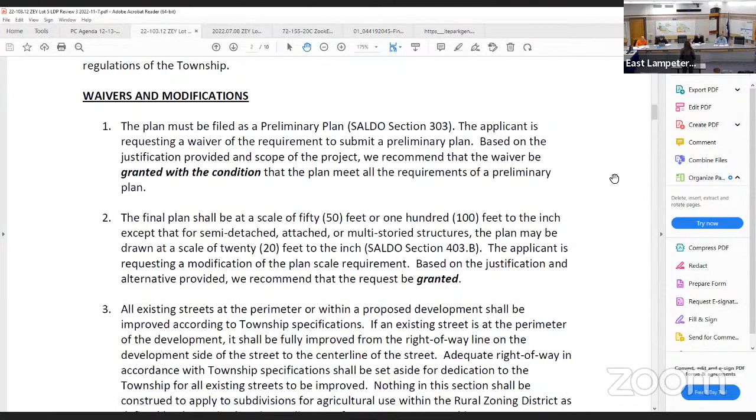I'd like to start by going through those requests, which I don't think will require much discussion. There are 10 total waiver and modification requests, reflected in David Miller's letter. 7 of them are recommended for approval, with little or no conditions placed on those recommendations, so our intent is to run through those 7 first. There are then 3 requests which may require additional discussion, and I think we'll take those last if it suits the Planning Commission.

There's a waiver of widening and curbing along Willow Road — those are 2 separate waiver requests, but can really be discussed together. There's also a request to defer installation of a pathway along Willow Road, which would be provided in lieu of sidewalk. And finally, we are proposing more than 125% of the minimum required parking on this site, which requires approval from the Board of Supervisors. We're asking the Planning Commission to make a recommendation that the board grant that approval as well this evening.

So with that by way of background, I'll have Dave come forward, walk through the plan, and then begin going over the waiver requests.

Good evening. Tony and Claudia generally walked through this, and I'll point out some things as we move forward. This is part of the greater 100-acre campus, business park campus of Greenfield Road, Willow Road, and then the newly constructed Ben Franklin Boulevard, which goes through that tract.

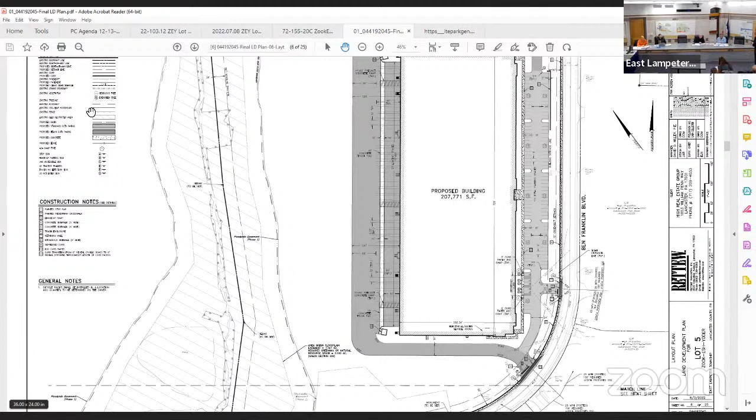The previous development within that business park was an expansion of the Eastwood Village residential community. Thaddeus Stevens is constructed and running. And then, as Tony mentioned, there was a previously approved industrial warehouse, about 229,000 square feet, that has been approved but is pending construction — that's known as Lot 4 over here. Greenfield North, that you're very familiar with, is on the other side of this tributary here.

So we're focused on Lot 5, which is a single warehouse building, a little under 210,000 square feet. It has two accesses, both off of Ben Franklin Boulevard, so no new accesses off of Willow Road. There's pedestrian parking in the front of the building, paralleling Ben Franklin Boulevard, and the loading area in the back of the building.

What's not shown on this particular plan, but would be of interest, is the fact that it's part of — I'll pull up the stormwater management and grading to get a little more flavor of this.

With Greenfield North being to the east, there is the riparian corridor from this tributary that's been planted and will be enhanced as part of Greenfield North. And then a landscape berm to provide further screening between the residential and industrial components has already been installed under a previous permit and planted, so that'll mature and provide nice screening between the uses.

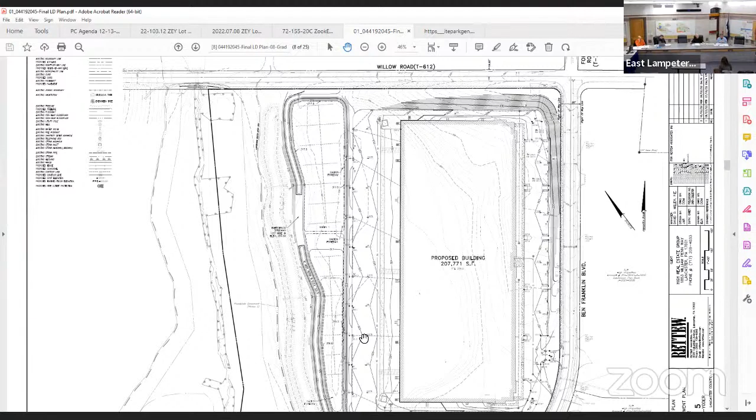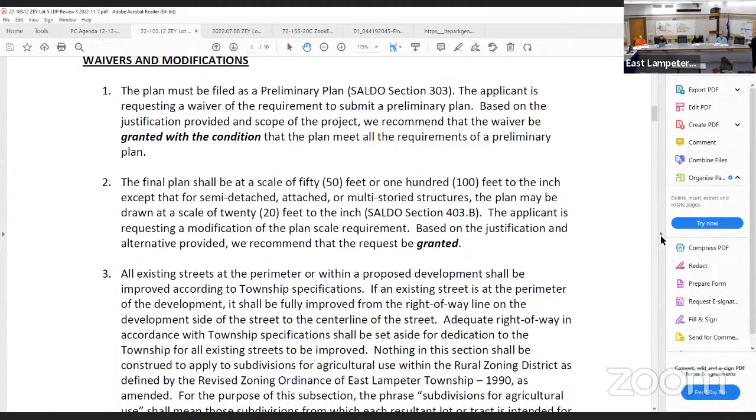Okay, so we do have the November 7th DMA letter. As Paulie mentioned, the first section of the letter is running through the waivers, modifications that we are requesting. I think the more basic ones: we're asking for a waiver of preliminary plan to go straight to final, and a waiver of plan scale so that we can show the information with more clarity.

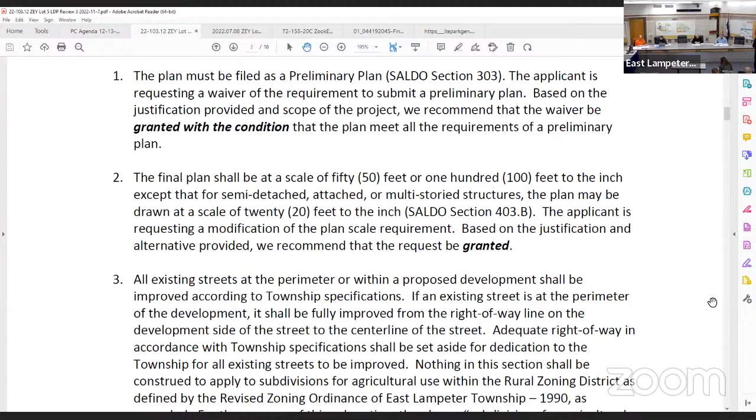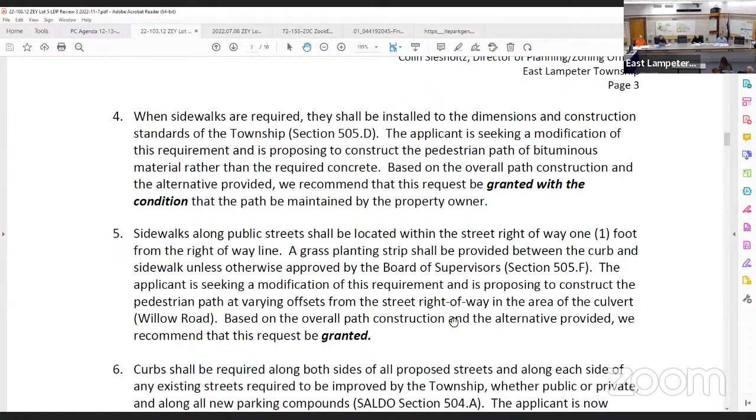We'll come back to number 3. Number 4 is a request that in lieu of installing concrete sidewalk along Willow Road, we would install a bituminous path. That would be consistent with the path being installed on Greenfield North, that cohesive walking trail system. The sidewalk along Ben Franklin Boulevard will be concrete, but then as we get to Willow it would be bituminous. So that's a waiver request of the township standards.

Number 4, Miller's letter also mentioned a condition that it would be property owner maintained. Yes, right, and that's how it is with Greenfield North too, so that's consistent with that.

Number 5 is a request for varying offsets from the sidewalk. The township standard is typically 1 foot off the right-of-way line, which we are providing for the majority of that. But then at the culvert, that's part of a bigger discussion we'll have, we are getting closer to the roadway there and protecting it with guide rail for safety purposes at that point.

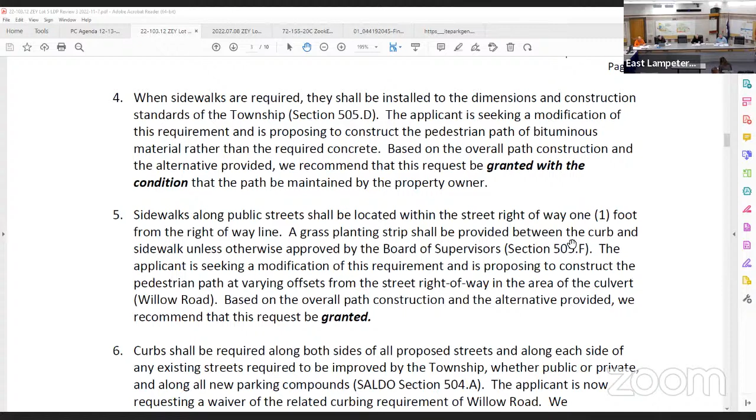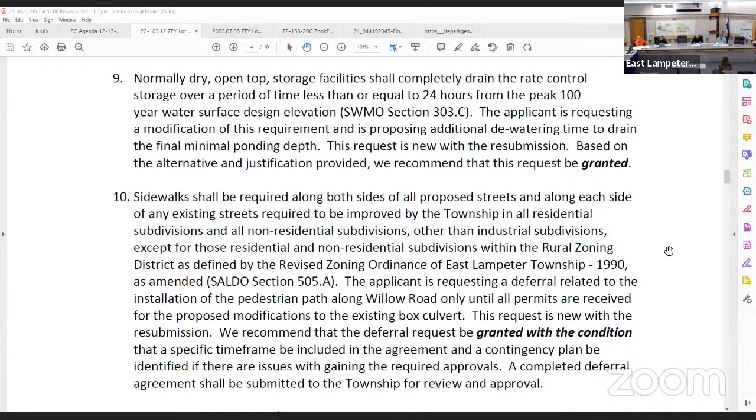So knowing that we want to talk about widening, curbing, and pedestrian path, before we do that, are there any questions on any of the other requests or comments that you'd like to talk to? Not from this side of the table. Thank you.

So Willow Road right now is classified as a collector road. It's a rural setting. Pavement width from center line over is 11.5 to 12 feet on both sides of the roadway. We are requesting a waiver of the widening requirement of Willow Road, which would be 18 feet from center line, technically what the ordinance would require for a collector road: 12-foot lane, 6-foot shoulder.

And we received a waiver of that requirement for Greenfield North portion of Willow Road, and we're requesting the same waiver for those improvements along Lot 5.

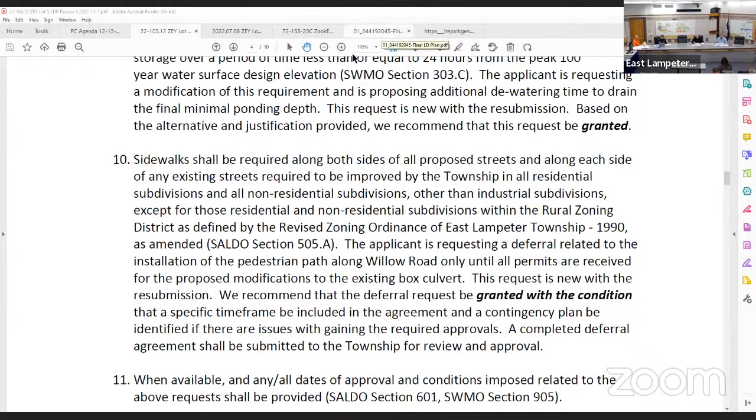Several reasons for that. First and foremost, I think, is to maintain the rural feel, the rural nature of this area. The center line of the urban growth boundary is the center line of Willow Road, so there's no foreseen development north of the road. There's an agreement that water service will not be provided by the city on that side of the road, so it's likely going to be in that rural condition for the very long term.

So from that standpoint, keeping the visual of the rural road. Also, all the development within the business park prohibits truck traffic from utilizing Willow Road or from exiting out onto Willow Road. So they'll all use Ben Franklin Boulevard, go out to what will be a signalized intersection at Greenfield Road and utilize the signal there. So we're not introducing truck traffic to Willow Road for that.

And it was the sense of the Planning Commission and the board to waive that, with no desire to widen Willow Road. With respect to Lot 1, the decision was to grant the waiver. So in this case, on this request for Lot 5, staff supported, DMA supported the waiver request.

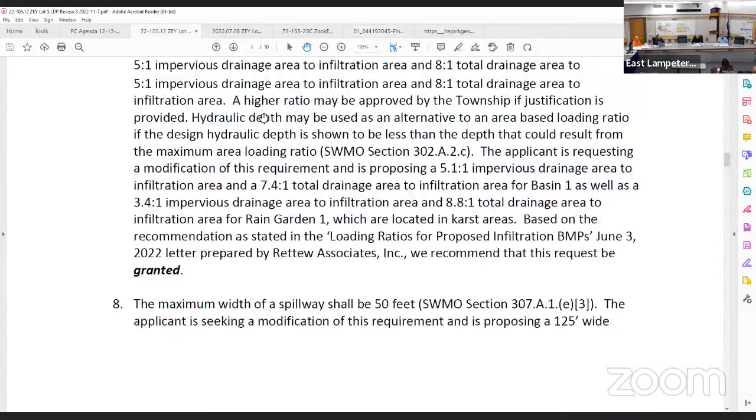Under number 3, we're saying that waiver should be denied, and it was the same in the previous situation that was on the board at that time. It was the waiver for Greenfield North. We're talking about it. Lot 1, which was Greenfield North, that wasn't.

And we can change our mind, but previously we had, and as Tony mentioned, DMA had suggested a deferral. But after some discussion, it was recommended and ultimately approved by the supervisor.

And along with that is the request to waive the curbing of Willow Road, for many of the same reasons: to keep the rural nature of the roadway, for consistency on either side of the business park. The only curbing is on the right-hand turn lane off of Willow onto Greenfield North. It's just a short stretch where it's widened for a right turn lane, and that's curbed. Otherwise, there's no curbing on Willow, so the waiver would maintain consistency with that.

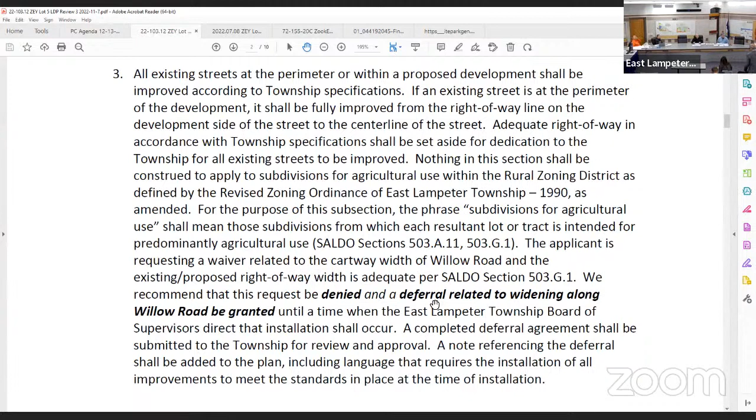You might want to mention about the utility poles. Right, so there are 5 utility poles right along the edge of pavement, right off the edge of pavement, that would have to be relocated for that even minor widening to install the curb. So that's working with PPL to actually get that done, and the cost thereof is extensive, and the time to get that accomplished. There's one near the culvert as well that would be required.

And just to jump back to the stormwater, this is a fairly level road. We're estimating inlets every 125 feet, which is a pretty good frequency. And keeping in mind that all of this will ultimately be owned and maintained by the township, that entire storm sewer and curb would need to be maintained.

One more thing, think about snow plowing. If you don't have a curb, you can push the snow off to the side. If you have a curb, the plow is going to stay a little bit off the curb, so now you have that snow right up against the curb, which also reduces the effective width. And there's maintenance for the township as well. So we did think through this request. We feel quite strongly that it's a better condition to leave the road in its current condition. We really didn't think of a benefit to installing the curb through there, so we're just asking for a straight waiver of that installation.

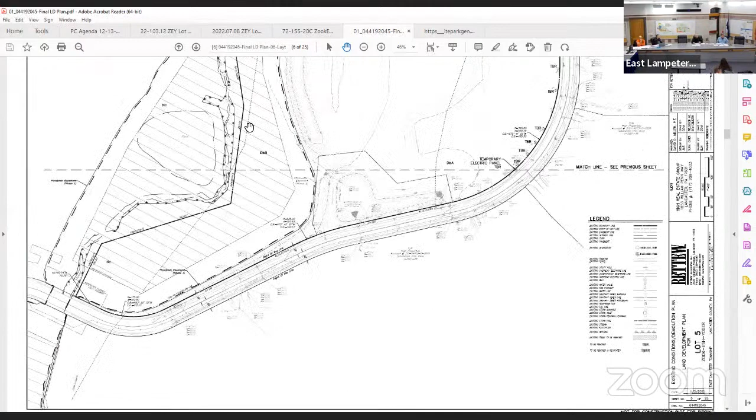At this point, the alternate suggestion would be, rather than continue the full length of Willow Road, circle that back, put the path on the berm of the basin. You get the view of the landscape berm and the riparian corridor through there. And then that would loop back to Ben Franklin Boulevard here and provide that circuitous loop through there. So we think that could be a workable solution, an alternate to all of this work here.

Comments from this side of the table? Darrell, this is Randy. I'd support the removal of the time frame issue, knowing that there are multiple players in awarding permits, some at the state level. So I think it would be challenging to put a time frame into a condition. And the fact that you have a contingency plan in place, I think I could support just granting the deferral request along with the deferral agreement.

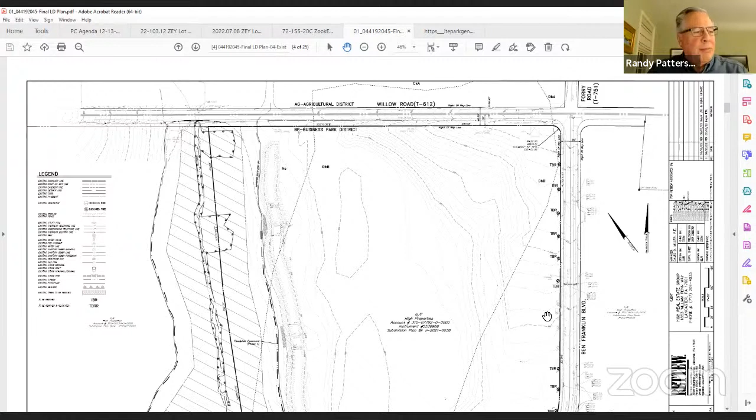If you will, can't that be part of the deferral agreement? Yeah, Darrell, I was going to suggest that language could be included in the deferral agreement, that if the permits were not obtained, as opposed to putting it into the land development plan approval. That's what I thought, yeah, and that was part of this recommendation from David Miller Associates, that a timeline be part of the deferral agreement. So the language could be modified to, and would be included, my understanding, in the deferral agreement, so it's understood what the deferral includes and any conditions.

But I can't speak for staff, because I don't know the discussion on their end of what they're looking at, as you said, the budget for it, to allow for the time to do it, et cetera. And then the other whole part, that third party of permits, is another issue.

No, I agree. I think the question in front of the planning commission right now is whether or not it should be deferred. All the details as far as timing, whatnot, can be hashed out with staff at a later date. But that's acceptable. Refresh me, does the township have standards for sidewalk width?

I believe you typically go a little wider with your bituminous, or am I wrong? It's 5 foot wide. Which matches the township standard. The township's 5, okay. For some reason I was thinking you went a little bit more. The path is 5. I was thinking there were 6, but I'm not sure. My visual is that they look a little wider, and I wasn't sure what you used, if you plow them, et cetera. 6 would probably be easier to plow without tearing up the sod or turf on one side or the other to clear them.

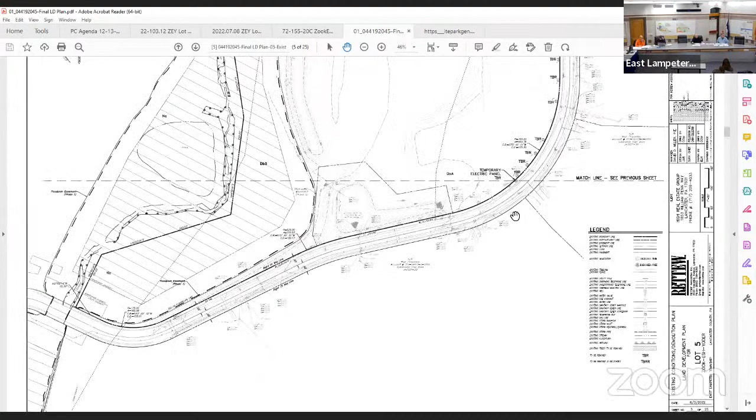And you have circulation along the end of the building? Yeah, right there. I was going to try to get rid of some of the clutter. Yes, this is one way through there, and primarily that is for fire access. So we've run the templates, we've coordinated this with both fire companies.

And they are good with what we're showing. You're showing that one way, and your dark area is the heavy duty pavement. I was just wondering why you didn't continue the heavy duty pavement through the car parking if you're going to run trucks around there. The tractor trailers will use this driveway and come to the back, and there's room for them to go back out the same way. So we don't really want to intermingle passenger vehicles with the truck traffic. This is really emergency. You have heavy duty pavement on the north side of the building, so we do that for fire trucks.

Question about the curbing. I think you mentioned earlier that there's curbing that was installed along the intersection of Willow and Greenfield, is that correct? There's existing curbing on Greenfield Road up to Willow, and there's the curb returns and then it ends. Okay, so but there's no real curbing on Willow.

Just to give a fully accurate answer, Greenfield Road is curbed on both sides. On our side, it wraps around and ends right here. On the other side, the west side, it continues around for, I'll say, 100 feet or so for that turning lane, and then it ends there. So that's really the only stretch that's curbed.

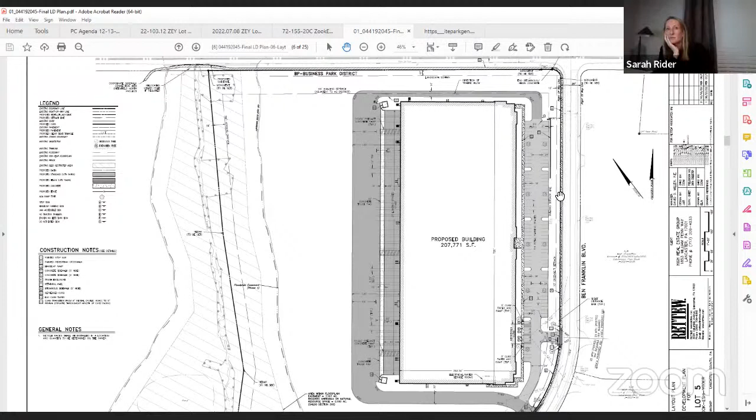Okay, that was my question. So are those intersections pretty similar with curbing? Right, and this is actually, Ben Franklin Boulevard has been installed as part of the previous phase of the business park. So Ben Franklin Boulevard is complete, and then it's curbed along Willow just right at that intersection, just going around to the curb return. Got it, okay. Yep, okay, thanks.

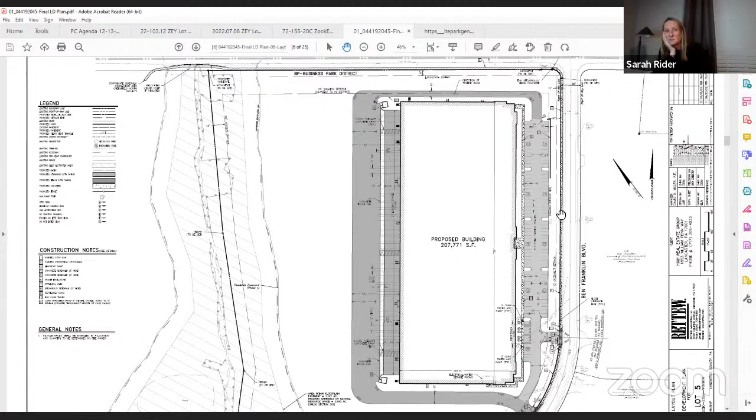And anything else on this? Yeah, we're going to. We can jump onto the parking issue if you like.

This should be a quick discussion, but the zoning ordinance for warehouse stipulates 1 parking space for every 2 employees on the largest shift. So 2 employees, 1 parking space, which in a practical sense is just not enough. This site is projected to have about 125 employees, and by ordinance that would be 63 parking spaces. Again, just not practical. Maybe that works for a city situation, but we believe it's not enough here.

The ordinance allows you to increase that by 25%. We are asking for 114 spaces, which is 181% of the minimum required by the zoning ordinance, so that is just shy of 1 per employee. It seems reasonable. If there's shift work going on and you've got overlap of shifts, all of those things come into play when designing a site. So we feel that 114 spaces is adequate to meet the need.

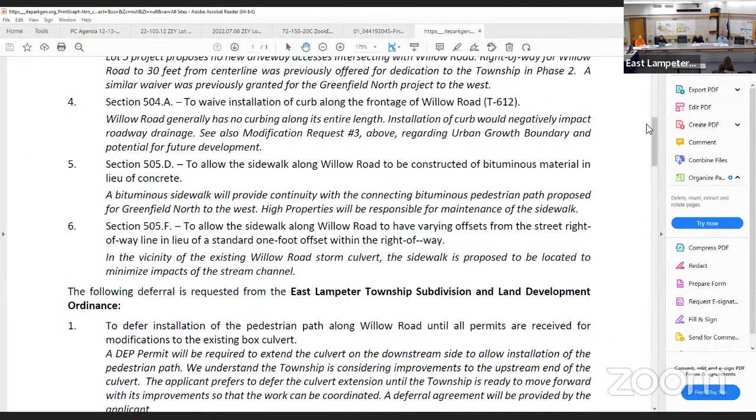DMA suggested that we provide some research from ITE, which we did and submitted. If you have that in front of you, we've got the ITE parking generation manual. For 125 employees, the average number of parking spaces would be 85, and the 85th percentile, in other words not the largest but a reasonable comfortable number, would be 142 spaces. We are at 114 spaces, so we fall somewhere between the average and 85th percentile with our request.

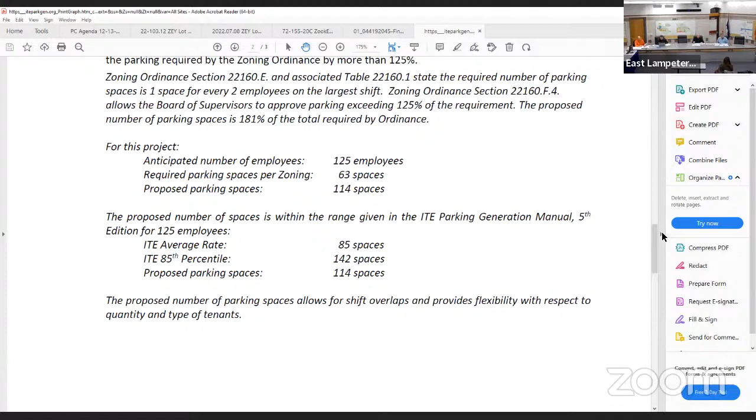The zoning ordinance does allow the supervisors to approve a greater number. It does not need to go through the zoning hearing board, but it is something the board has the ability to approve. Again, we feel comfortable that's a good number. It's not excessive. As you can see, it's a double bay of parking along most of the front of the building. It's not a sea of parking.

Will you be running more than 1 shift in this building? Most likely, yes. There'll be overlapping shifts, if you will, that would necessitate the potential of the next shift coming in before the current shift leaves, which creates an issue for parking. That building can be configured small.

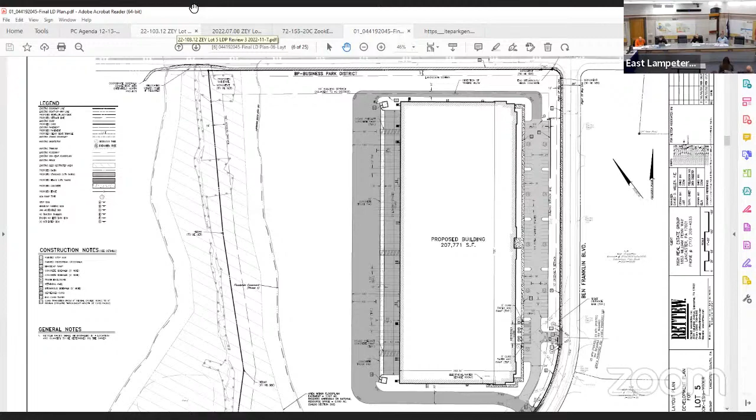Not all the shifts are... Other than the DMA letter, we have no issues with any of the comments. We can address those. We do have a letter from the county planning department from July 1st.

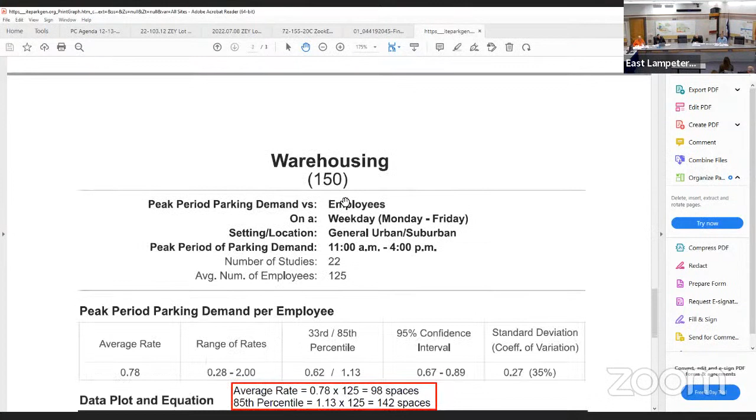There were 7 subdivision and land development comments. We don't have any issue complying with those. And then there's stormwater management, there were 5, and we don't have any issue complying with those 5 either.

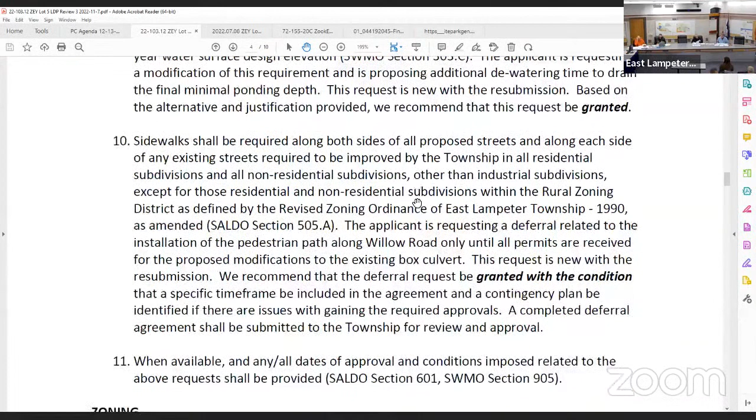The county letter from July 1st is generally a will-comply, with some caveats just to make sure we're communicating 100%. Number 1 speaks to the signature block. We made that change.

Number 2, there were street trees planted along Ben Franklin Boulevard, and some of them need to be removed. We actually had probably most of them being removed as part of this project originally, at the time the department reviewed the letter, but now we are replacing the majority of those trees. There are places at the driveways, sight triangles, that type of thing, where we're not able to replace those trees. I will point out those trees were planted voluntarily by High. It's not a township requirement for street trees, so it's kind of an added benefit that they put any trees in at all, frankly.

And they will be replacing the trees as they are able to once this gets regraded. So I think in the spirit of things, we're complying with that, but just wanted to point out that subtlety.

Number 3, yes. Number 4, regarding bicycle parking, we do have a note that bicycle parking or bicycle facilities will be provided. Number 5, we addressed. Number 6, we expanded on the note on the plans to say that the sign cannot be located within a clear sight triangle or other easements. Of course, any of that signage needs to comply with zoning and get the appropriate permits from the township.

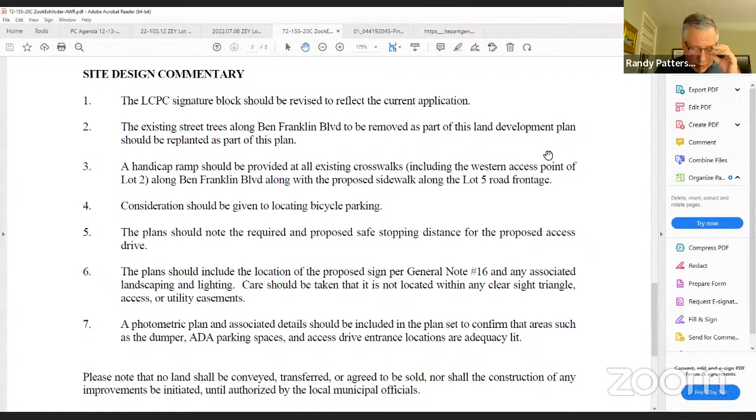That the waivers and modifications requested by High Properties in the November 7th letter from David Miller Associates be approved with the following changes: on the waiver request for Willow Road, rather than a deferral as proposed by David Miller Associates, the waiver request be granted. On the issue of curbing, we follow David Miller Associates with the explanation that it is to remain consistent with prior approvals for Greenfield North and Lot 1, so a deferral would be granted and a deferral agreement put in place.

And on the relationship to the pedestrian path along Willow Road, that the deferral be granted without condition. And that all other items related to zoning, subdivision and land development, and stormwater management be complied with by High Properties, as well as the Planning Commission letter dated July 1st, 2022.

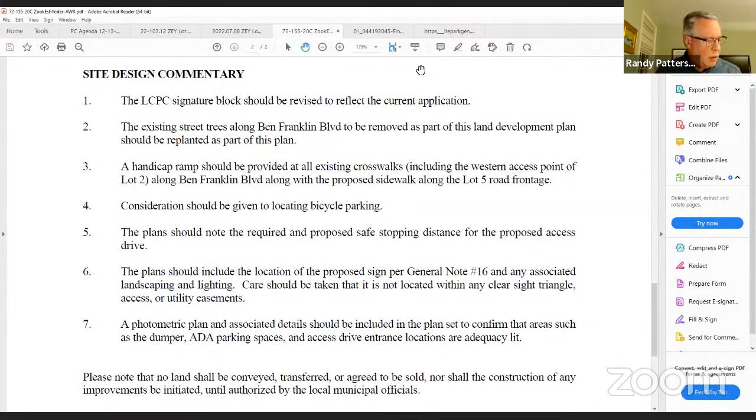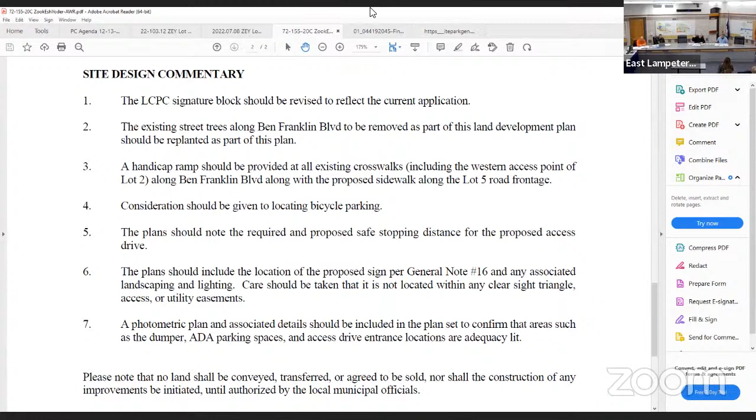Thank you, Randy. So with that, we have a motion. Do I have a second? A second, we have a second from Jerry. All those in favor say aye and raise your hand. Aye. Unanimous. So thank you, thank you for your presentation and time this evening, and working with staff to get to this point.

Next item on the agenda under new business is Paradise Energy Solutions, 2985 Lincoln Highway East. Preliminary final land development plan.

Harbor Engineering. I'm here tonight with Paul Soltis, representing the applicant, Jack Leathers Holdings, and Richard Huber from Huber Buildings. This is a land development project for property at the northeast corner of Lebanon Road and Route 30. It's currently owned by a gentleman named Ephraim Esch, and it was occupied by American Outback Buildings in the front. Maybe you've seen their storage buildings, they've been there for quite some time.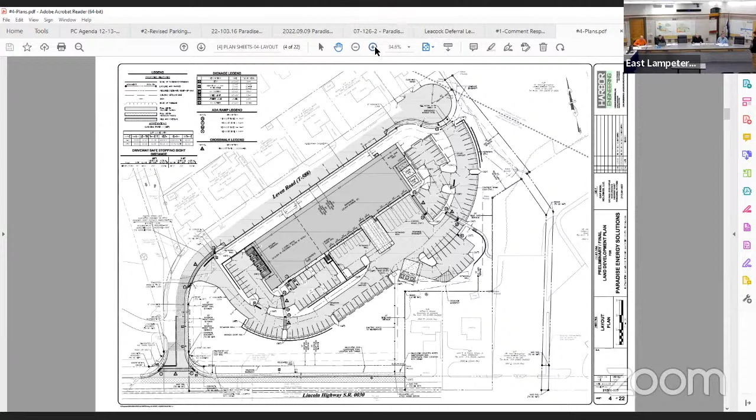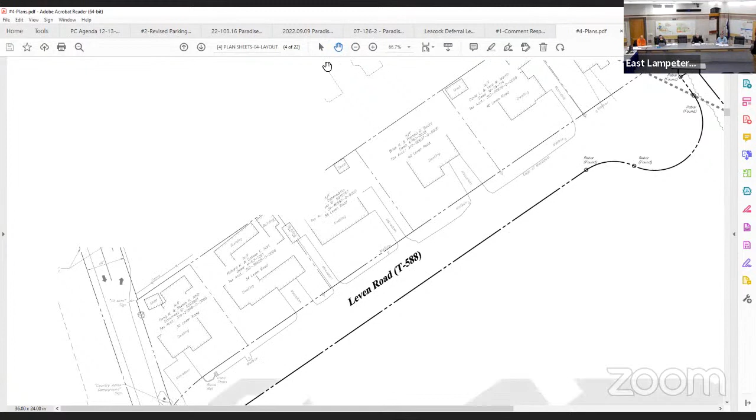The access for the property is going to be from Leven Road. There's an access drive proposed directly across the street from the access to the campground. Leven Road will be widened and the cul-de-sac will be defined, currently it's just sort of a dead-end road. The cul-de-sac with an emergency access for fire and emergency personnel. Cul-de-sac bulb, curbing and sidewalk are proposed on Leven Road and Route 30. Some intersection improvements are also proposed on Leven Road to widen the radiuses to allow for semi trucks to get in and out of the site, or in and out of Leven Road on Route 30 without crossing the center line.

The property will have about 115 parking spaces, loading docks facing to the south, parking throughout, and a number of retaining walls to help make up grade in certain areas of the site. There'll be multiple stormwater facilities. There are 2 infiltration basins, those are the dark green areas, and there will be underground stormwater infiltration basins underneath portions of the project. It'll be served by public sewer and on-lot water, and as part of the on-lot water, there will be a cistern water tank in the building for fire suppression due to the size.

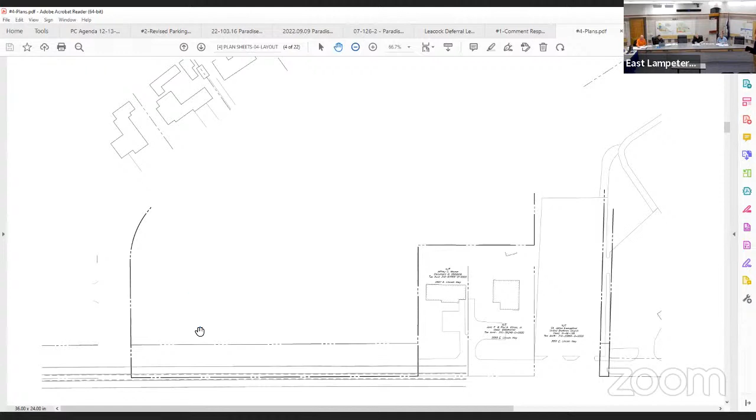That's pretty much it, it's a pretty straightforward project. We've been through a couple of rounds of reviews with the township staff and David Miller Associates, so we're at a point where we have a clean review letter. There are very few, really no technical comments remaining, just a few outstanding items that we're looking for as far as approval. We are asking for a few modifications from both the subdivision land development ordinance and the stormwater, which I can go through. But before I do that, does the planning commission have any questions about what we're proposing in this project?

I think we're okay. We do have a deferral from Leacock Township, since a few square feet in the northern corner, very small portions, are in Leacock Township. We have submitted plans to them and their board of supervisors deferred, because it's actually minimal development there. Part of it is in the road right of way, even north of the cul-de-sac pavement. Correct, it's a very, very small piece, less than 1,000 square feet. Thanks for pointing that out.

If not, we'll go on with the Dave Miller letter. Yeah, we can modify.

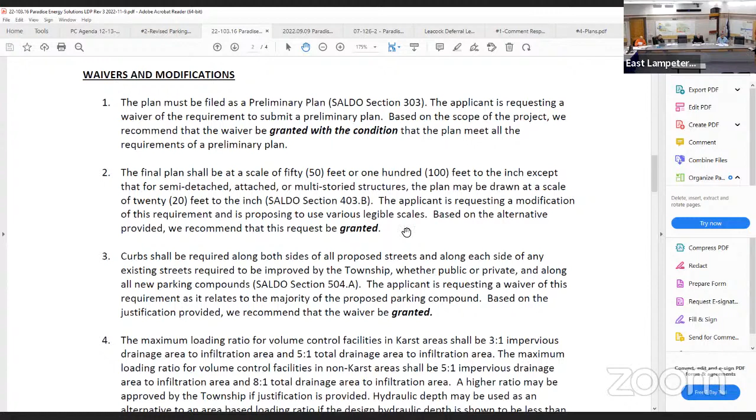So I'll just run through these briefly, stop me if I'm going too fast, but we're asking for a modification for preliminary plans since the plan will be constructed in phases. Asking for plan scale and various scales for legibility and constructability. We're asking for a modification of curbing within the site. We are putting curbing, as I mentioned, along Leven Road. I forgot to mention, on Leven Road we're also proposing a row of parallel parking spaces, which will be within the public right of way.

That will relate to a later modification. So the curbing on the perimeter is proposed. There are certain areas within the site that we're asking for waivers of curbing where it's not necessary to protect pedestrians from sidewalks and to allow sheet flow for stormwater. We're asking for a modification of loading ratios for the basins.

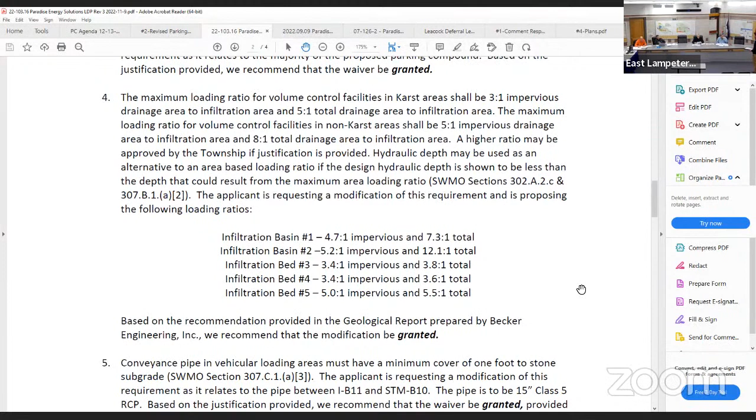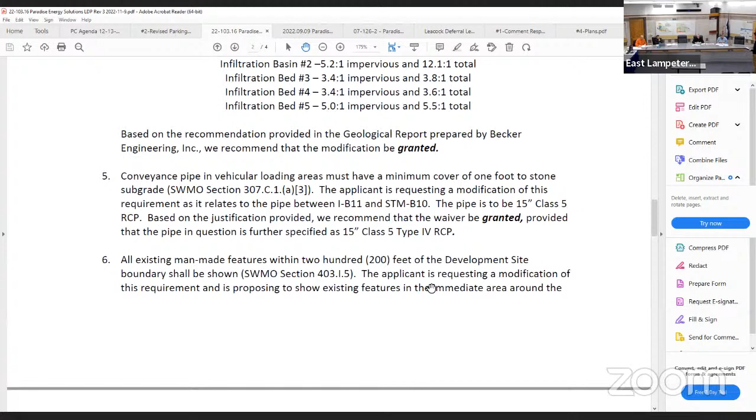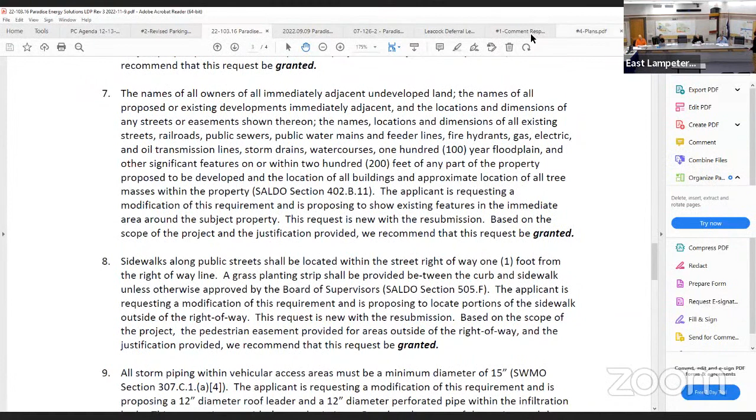We're asking for a modification for sidewalk placement on public streets, outside the public right of way. What we're proposing is along Leven Road, the back of the right of way where a local road comes to the face of the curb and the sidewalk. We're proposing this because of the parallel parking we're showing. Rather than widen the sidewalk and create more area for the township to maintain, we're proposing a pedestrian easement over the sidewalk. So it's still available for public use, but the sidewalk is in an alternate location.

And we're asking for a modification of 12 inches in size for some of the roof leaders and distribution piping. So those are the modifications.

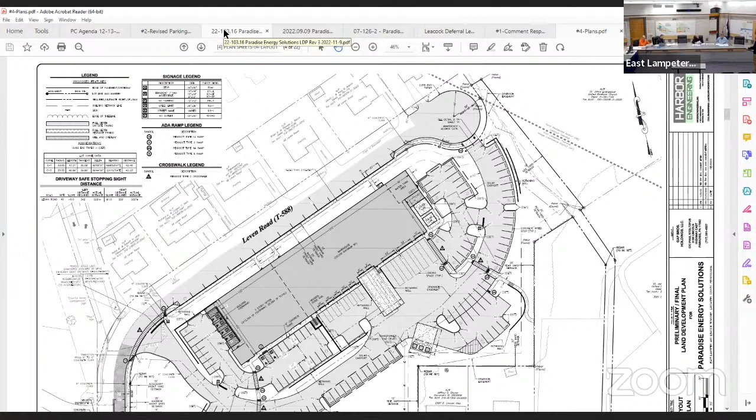It's not a modification, but similar to the last plan, we had extensive discussions with township staff about the parking on the site. Ultimately, what we ended up using was to determine the required parking for office and warehousing, which is more appropriate to this site, and we're right at 125%.

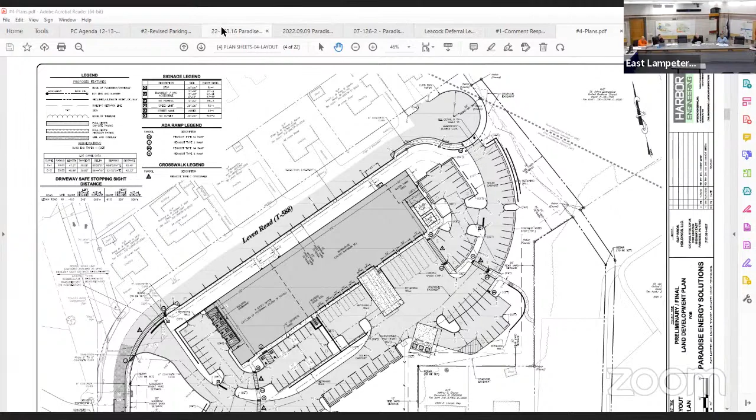Just a note on the 9 waivers and modifications requested: Dave Miller's letter recommends all of those be granted with one exception on the first one, and that is all requirements of preliminary and final. Correct, with that condition. That's the only one that had a condition. The others are recommended to be granted, per Dave Miller's letter.

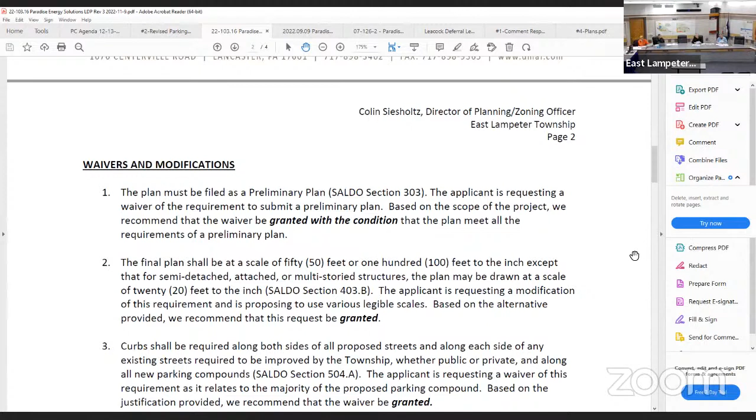Comments, questions on the waivers or modifications? I don't have any comments or questions on those, but I would like them to address the planning commission letter because of the extensive comments they provided.

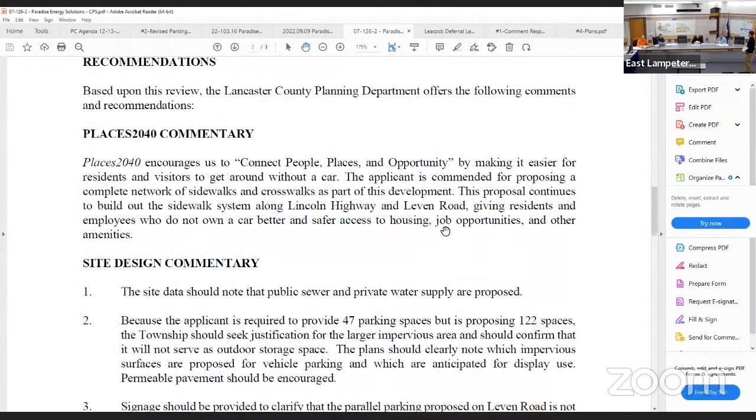Which Planning Commission - Lancaster County, okay. Well, we finished Dave Miller's under zoning, we don't have any issues with that. And then subdivision and development, there were just 5 comments, and you have no issue combining stormwater in with those.

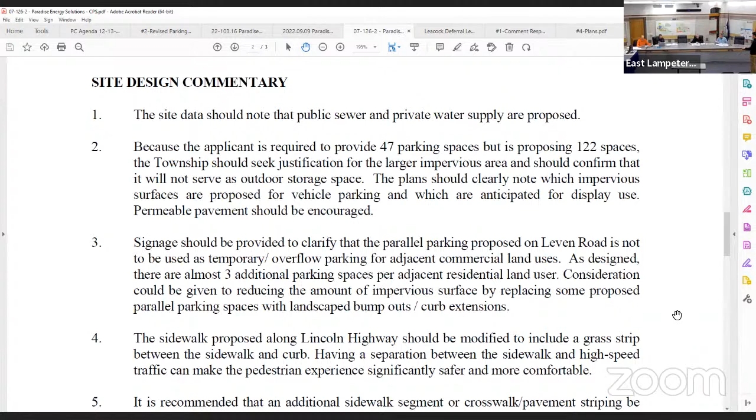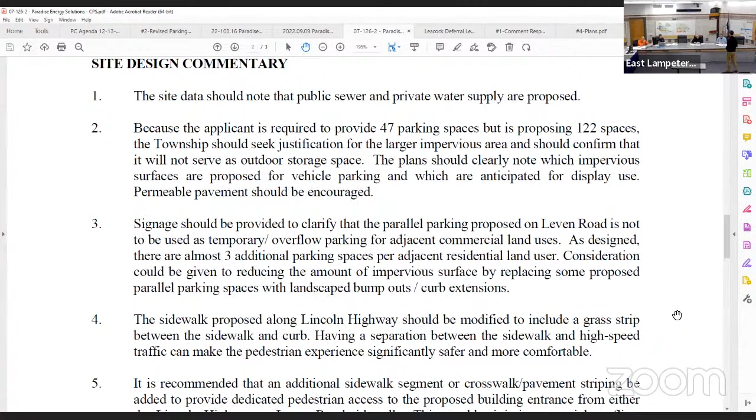So yes, Randy, the September 6th letter - I think that date may be wrong, is that correct? No, it should be 2022. I think it should be, because we submitted the plan in 2022, in August, which is before you would submit the plan. So just a note that the county's letter memo is dated September 6th, 2022.

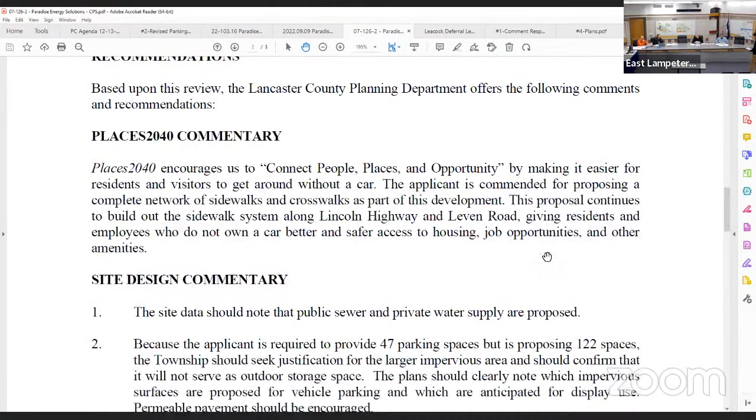Have you seen these previously? I have, yes. All right, so I'll just run through these one at a time.

The site data should note that public sewer and private water supply are proposed. That has been updated since we made the submission.

Comment number 2: because the applicant is required to provide 47 parking spaces but is proposing 122 spaces, the township should seek justification for the larger impervious area, and should confirm that it will not serve as outdoor storage space, et cetera.

So a couple of modifications have been made since the original submission. We actually backed down the parking to 115 based on 125% of the ITE manual. As I mentioned earlier, we feel comfortable that this is the appropriate number of parking spaces for this project based on that.

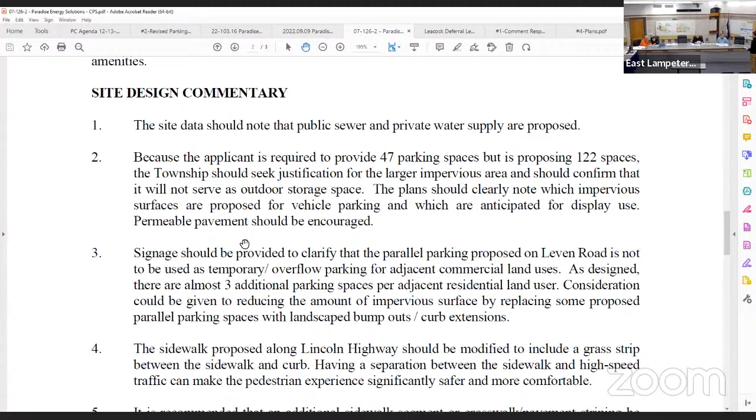We feel that that's been addressed. The last sentence on that is that permeable pavement should be encouraged. Do you have any thoughts on that?

I do. There's a lot of truck traffic through the site - it's an industrial space, warehouse. We have used porous pavement on many projects where we feel it's appropriate, but we don't feel it's appropriate here. We are conveying water to underground stormwater facilities via inlets and filters, which is essentially the same thing as porous pavement - even if you put down porous pavement, it still counts as an impervious surface and you still have to do stormwater management.

So we're getting it there in an alternate way. It's probably more appropriate.

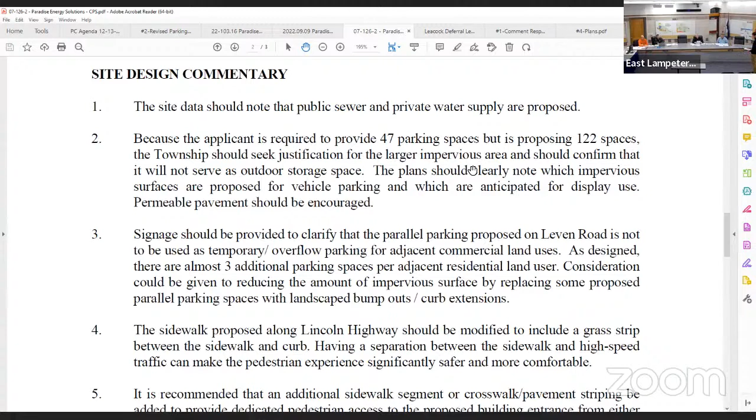Comment 3: signage should be provided to clarify that the parallel parking on Leven Road is not to be used as temporary overflow parking for adjacent commercial land uses. As designed, there are almost 3 additional parking spaces per adjacent residential land use.

Consideration should be given to reducing the amount of impervious surface by replacing some of those parallel spaces with landscape bump-outs or curb extensions. We've talked about this with staff - we feel that the 17 parking spaces along Leven Road would be a benefit to both the applicant and visitors, or parking that exceeds the capacity of the site in any event, and it would also provide parking for the neighbors to use.

We're not proposing any signage, and that's a discussion for council staff. This is not restricted parking, and it's not specific to Paradise Energy Solutions. It's open to anybody, first come, first served. We feel parallel parking would be a benefit here, and because it's a dead-end road, cul-de-sac vehicles won't be traveling fast. We feel it's a great place to provide parallel parking, easily accessed by residents and, if need be, by the business.

Will there be any indication that there's only parking in one direction, since it's only on the right-hand side of the road? I don't know if I've ever seen a sign like that. I suppose somebody could park in the wrong direction, come around the cul-de-sac, and pull in there.

I may be overthinking it, but an employee who wants to get out quick would find it a lot faster to leave a parking space facing towards Lincoln Highway at the end of the day than getting out of the larger parking lot when the workday's done.

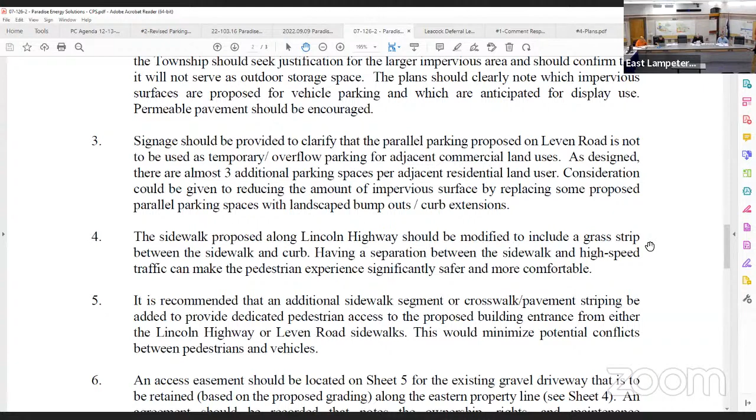Number 4 is about providing a sidewalk and grass strip along Lincoln Highway. We did update that since our submission, so it's consistent. I know to the west there's a strip with curbing, grass strip, and sidewalk.

Number 5 recommends additional crosswalk pavement striping for pedestrian access within the parking lot and from the roadway. In this case, we really don't anticipate a lot of pedestrians coming from either Leven Road or Lincoln Highway into the site. There's the access drive itself, which is traversable without a sidewalk, so we didn't feel a sidewalk was really necessary.

Now, we do have the sidewalk on Leven Road, with sidewalk connections directly to the building. Number 6 is about a gravel driveway on the eastern property line. That's actually gone - it was referring to a farm lane that used to go into an adjacent property through this site. That's no longer there.

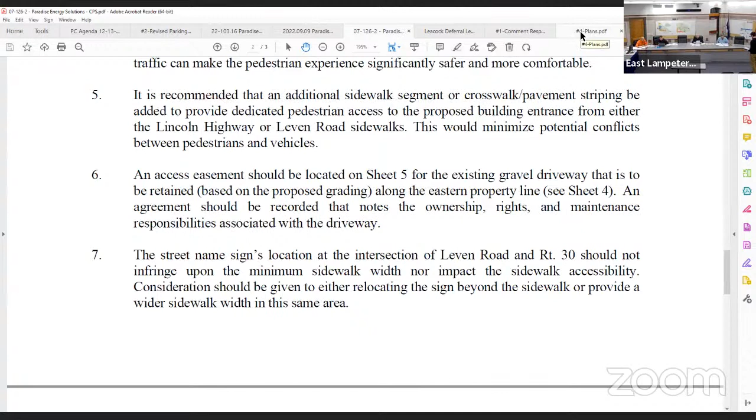The street name sign location at the intersection of Leven Road and Route 30 should not infringe upon the minimum sidewalk width or impact sidewalk accessibility. Consideration should be given to either relocating the sign beyond the sidewalk or providing a wider sidewalk in that area. I think we addressed that too, the street sign, so that's not a concern either.

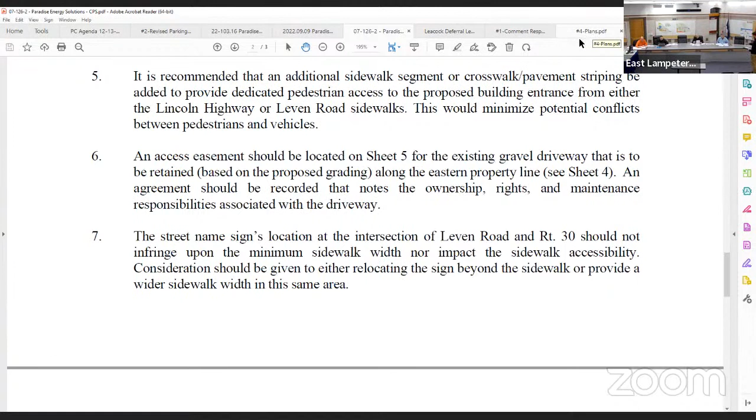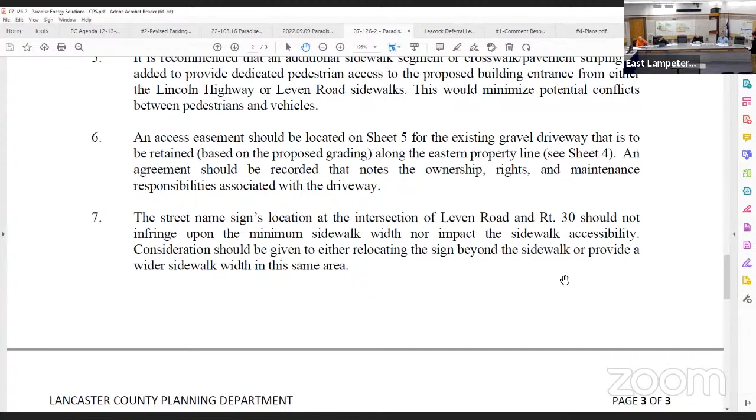The last couple of comments are about landscaping, which I think we made adjustments for, including some landscaping proposed beneath the solar carport area. And please confirm the truck turning radii will enable trash disposal without issue - we submitted truck turning exhibits as part of our application showing that semi trucks, emergency service providers, and trash trucks can work through the site without impacting landscape items. Thank you.

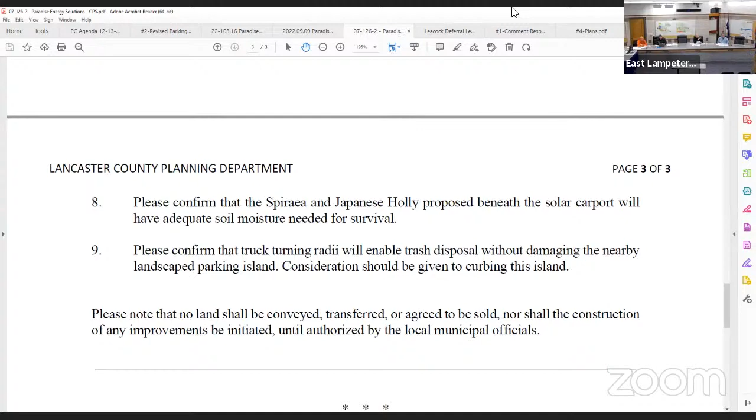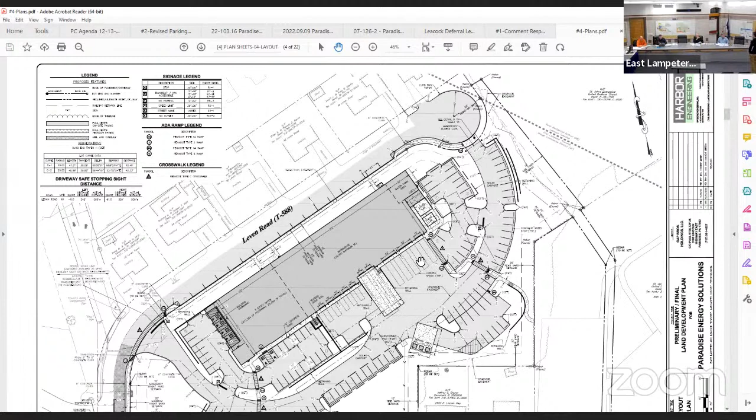What if a driver misses that right turn and goes down Leven Road to your cul-de-sac - is that radius large enough, and will you have that gated at the end? If I understand, that would be for fire access. Is that radius big enough that they could turn around?

I have a second concern about when you come up Lincoln Highway at the curve of Leven Road - on the left, that's an access to the campgrounds. There's a driveway into Pine Hill Trailers first, and then access to the campground directly across from our access drive. So my other concern is there will be new people potentially coming there.

If they miss that turn and go down Leven Road with their fifth wheel or trailer, are they going to be able to turn around and get out without issue? I'm concerned that the radii is sufficient in that cul-de-sac to allow for trucks that may miss the turn, bringing deliveries by tractor trailer, and also campers, so you don't create a situation where they can't get out.

Right, so currently for Leven Road it's just a dead end. It doesn't have a cul-de-sac at all. So I guess if somebody missed the campground now, they would probably have to back up down the road.

We designed this cul-de-sac bulb to meet the township local road standards. So it's got a 50-foot right of way, 100-foot diameter, and an 80-foot diameter cul-de-sac bulb. That's designed so it's large enough for fire trucks and other apparatus to turn around. We didn't run it, but I would presume that would also work for a car trailer or a camper.

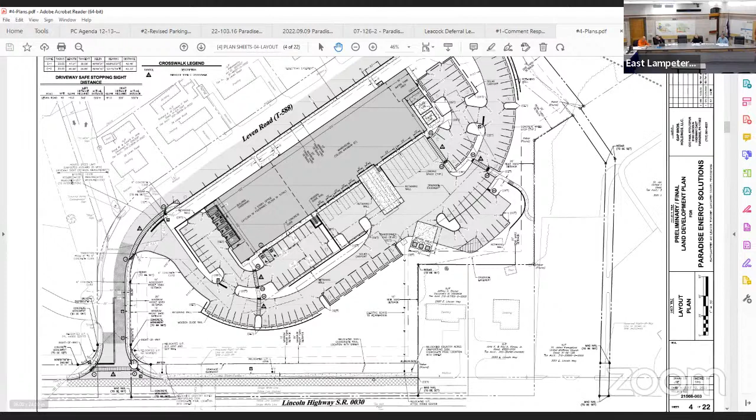Okay, on Lincoln Highway, since there's going to be the campground sign and the billboard, then you would have to get a variance for along Lincoln Highway because the sign ordinance says one freestanding sign per street frontage. I think the maximum is two, so you could have one along Leven Road as long as there's no signage there, but along Lincoln Highway you'd have to go for a variance to put a freestanding sign there.

But the existing signs can stay, is that correct? Like the two existing signs that are there, they're just getting moved back a few feet to accommodate the sidewalk. That wouldn't require a variance, right? Because they're existing.

That wouldn't require a variance, just any new signage. Good to know. I don't know that we've really gotten to the point yet of figuring out where we want the signage. Good to know.

Any other comments? Questions? I have one question, I guess. So you have a couple residential properties across the street. What kind of lighting are you proposing for the parking areas, and are those residential properties protected from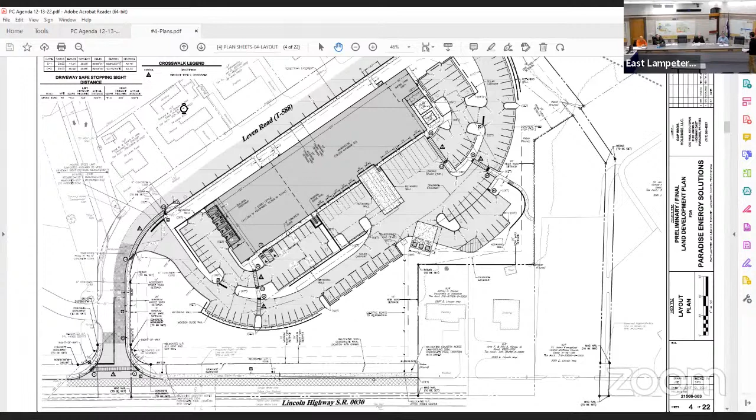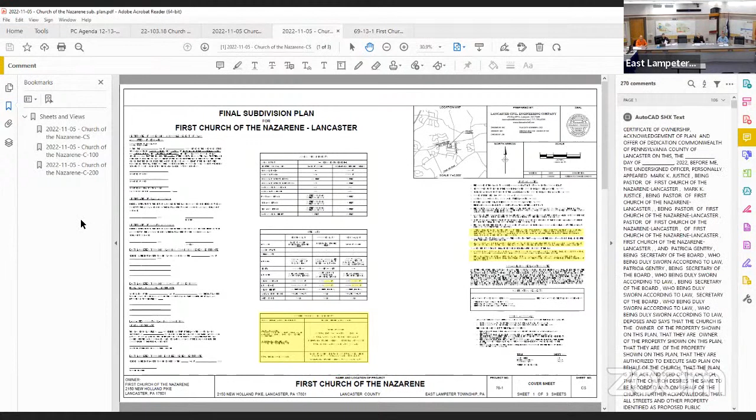Thank you. I may just, on a side note, are you moving your whole operation to this building from your other place down Lincoln Highway a little further? I believe Lincoln Highway, right now the plan is to move to Paradise Energy Solutions and have Upward stay in the current building. That's the current plan. And I'm sorry, have what stay? Upward broadband would be the wireless internet service provider. Oh, okay, currently using part of that building. But now they would stay as a Paradise Energy. Thank you.

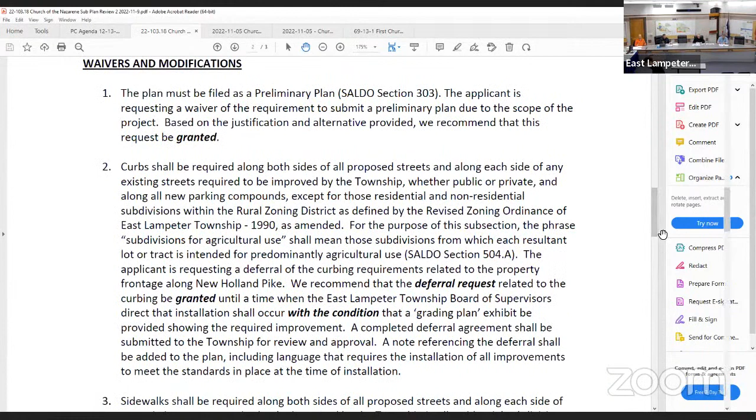Next item, First Church of Nazarene, 2150 New Holland Pike, final subdivision plan. Welcome.

My name is TJ Costa. I'm with Lancaster Civil Engineering Company, here with Mr. Mark Justice, pastor of First Church of the Nazarene. I'll make this short and sweet, it's a fairly simple plan, so I'll move forward here. Again, it's a final subdivision plan, you can see it on the screen for the First Church of the Nazarene. It's located at 2150 New Holland Pike. The existing property contains a church building, and on the lower right corner of the plan there, an unoccupied dwelling that the church no longer has used for. The existing lot is about 7.9 acres.

Existing property access for the church is off of New Holland Pike, located at the top of the plan. That is the primary means of egress and ingress, and the property also connects to Sherreem Road down on the lower corner. That entrance is currently cut off, restricted. There are metal posts currently blocking the road, so no one can get through. That's the existing layout, and I don't have anything more to say for that.

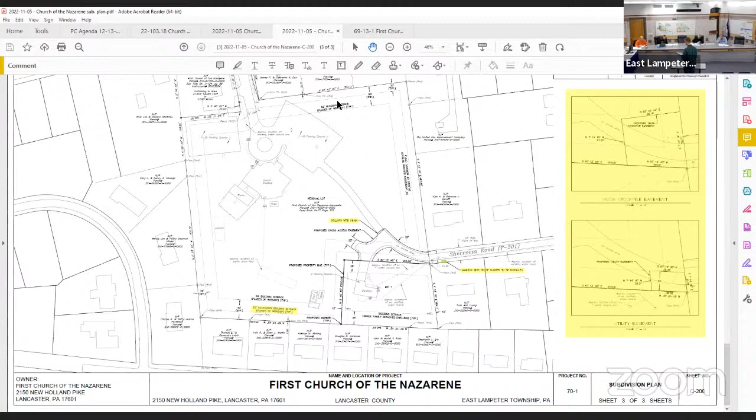So the proposed layout, which is on the next sheet, subdivides off the lower unused dwelling at the bottom corner of the lot. That lower lot is about 0.9 acres. So the residual property will remain at about 6.8 acres, net amount.

For lot one, there are several easements related to it. There are actually 3 different easements that will be shown. The first one shown is a cross-access easement. This is to allow access to the property from Sherreem Road. Those metal posts that are currently there will be removed and relocated slightly further up the access drive so that there is not through access from Sherreem to the church.

Second easement in this location is a utility easement. There's on the very small corner of the residual lot, water and sewer lines that will remain on the residual lot. So there's a utility easement proposed in that location to encompass those. And then the third easement is a snow stockpile easement for the very end of Sherreem, just for use by the township, for the public works department, for snow removal in that area.

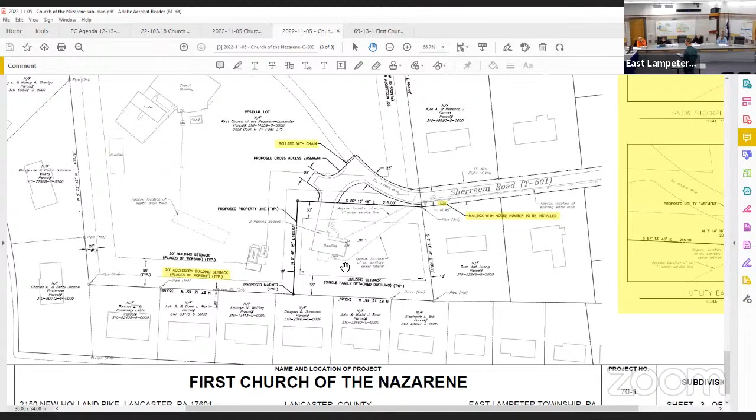There is a small strip of right of way being dedicated on New Holland Pike, at the very top of the plan, where it says the proposed concrete monuments, small strip of land there. It's just to meet the difference on the requirements.

That's really it for the existing proposed layout. Are there any questions on that at this point?

If not, then we do have a comment letter from the engineer from BMA, which we do plan to address. At this point, we foresee no issues addressing the main comments on these plans. I'm happy to either review these comments, if we go for them, and I'm also happy to review any waiver modifications required, if you so desire.

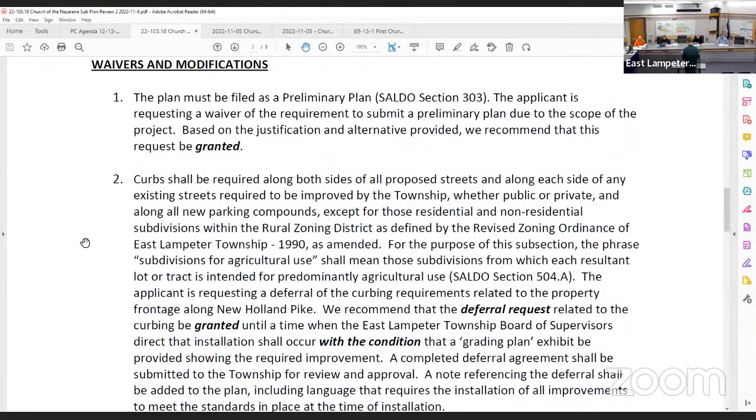Well, under the Dave Miller letter, dated November 9th, the first waiver was for the preliminary plan, and the recommendation is to grant that request to submit as a final, as long as you meet the requirements of both preliminary and final. That's correct.

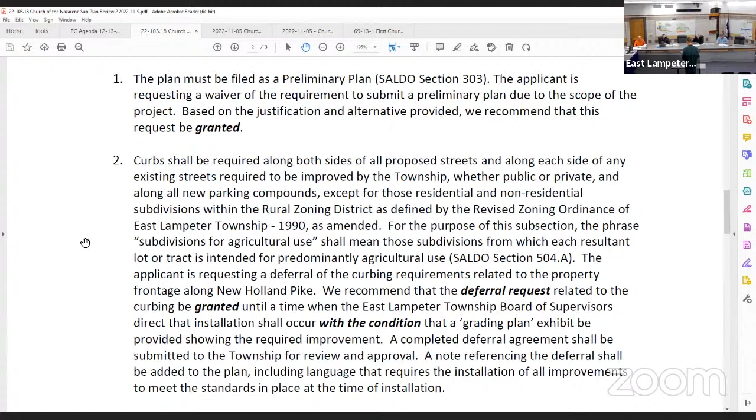Second item is curbs along both sides of all proposed streets, which is a requirement. The applicant requested a deferral of the curbing requirements related to the frontage along New Holland Pike, which is where the entrance to the church property is. It's recommended a deferral be granted for curbing until such time as East Lampeter Township Board of Supervisors directs that it be installed. Now, it had a condition there of doing a grading plan and showing that, and you're okay with that?

Yes, so a small sidewalk and curb exhibit was submitted to the township. I don't know if we have it here, but I don't think we do. We have no problem preparing and submitting something now showing the limits that would be deferred for the location of curbs. That would require a written deferral agreement, correct, between the owner and the township.

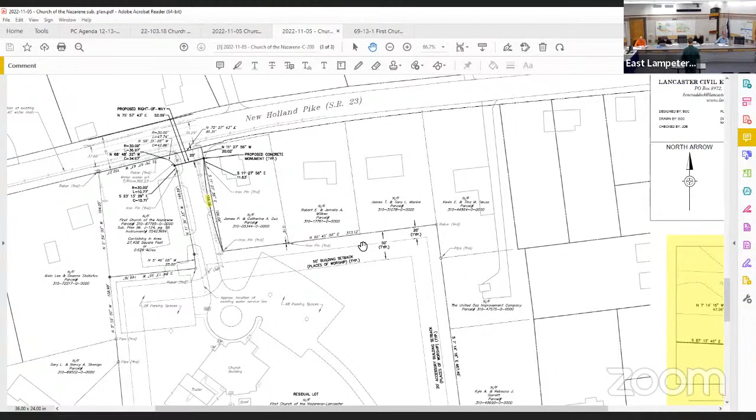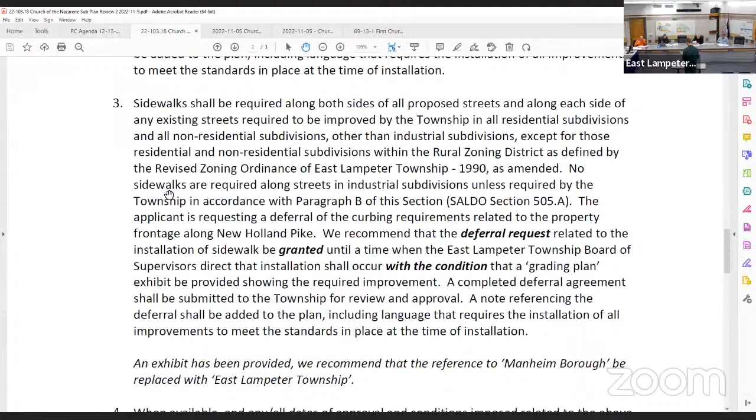And the third item are sidewalks, and a deferral of curbing requirements among the project. I assume that's to be a deferral of sidewalks. I recommend a deferral request relating to installation of sidewalks be granted, with the condition of a grading plan. Correct, so it's consistent for the curbing and sidewalks.

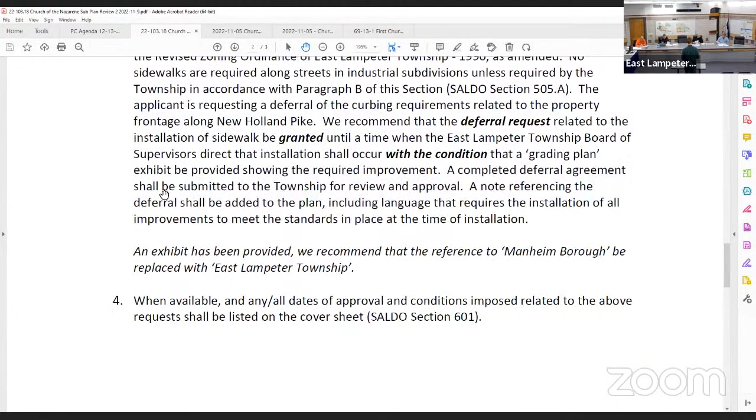Does that conflict with something the county said, or is that a different issue? The county apparently saw something asking for a waiver. Did you request a waiver at any point? I don't believe we requested a waiver, I think it's just been the deferral. Yeah, I think that may have been a mistake on the county's part.

This time, no. But my understanding is that a deferral was requested throughout, so the county may have just misread that. So actually, they're recommending deferral in their number 2, and that's what was requested and being recommended by Dave Miller's letter. So it's consistent with the exception of the county saying a waiver was requested. Yep, that's correct.

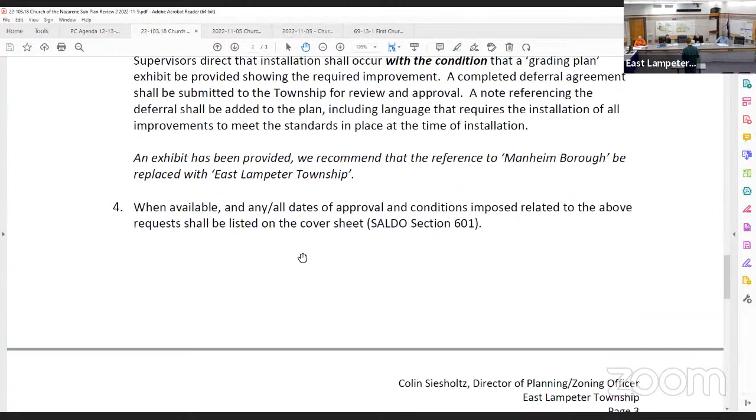And then, well, yeah, actually, the fourth item is they ought to be shown on the plan.

And then there were 4 items under subdivision and land development. I believe the first item you've taken care of, the closure of the boundaries. The easements you referenced - are those easements, for this plus or minus an acre, all on the remaining church property?

That's correct. And those easements were for snow removal and access to this property. Correct, snow removal access and utilities. Because Sherreem currently ends at the church property. Yeah, that's correct.

And then this 0.86 acres, just the northeast - the northeast corner touches the southwest corner of the right of way. Okay, yep, that's correct. So the easement would be required to give access to the property. Yes.

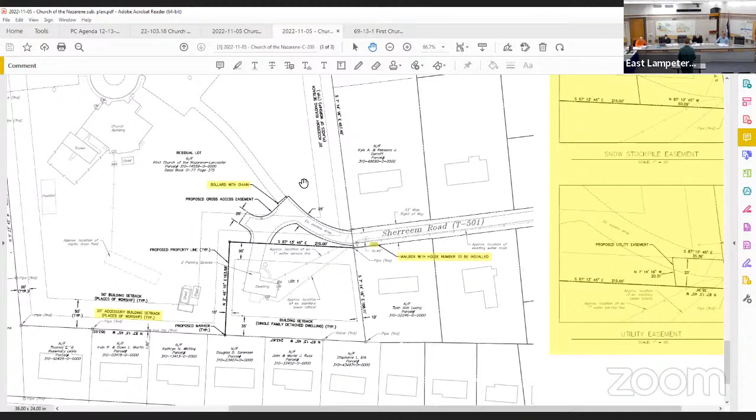And the financial security is the third item. The residual lot would be used for on-lot disposal. Oh, and then the fourth one is an on-lot disposal system for the future.

And I believe you spoke with the township already to have that checked. Correct, yes, we have performed the on-site probe as well as the percolation tests. Those were just recently completed. I think Marvin should have the results at this point. So again, coordinating that, we'll have the location for proposed replacement shown on the plan.

So having all that information would be good before you go to the supervisors, for clarity.

And as Sherry mentioned, we have the county review of September 21st, 2022 - a shared access agreement should be provided and recorded. And that will be done. We discussed that item too, as being a deferral and not a waiver. And then revised deeds for the resultant lots should be recorded as part of the plan approval.